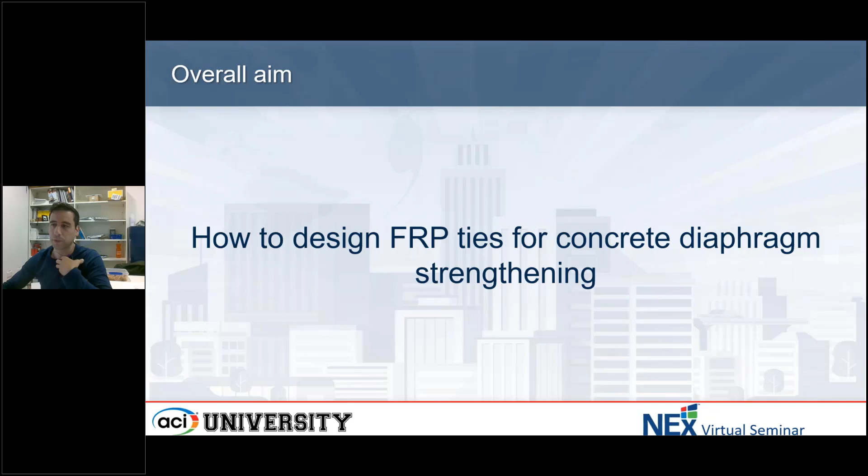The very first thing we realized when we started this project is that virtually all of the research up until a few years ago was on very, very thin FRP ties or FRP sheets, usually 1 millimeter, 0.04 inches. So that does not relate to real life. In a real building, we're going to have 3, 4, 5 times as much. And all of the research is on very short ties, often 200, 300 millimeters, and in real life we have several meters. So that is the first thing that we needed to do: characterize the behavior of FRP ties in a real scenario with real sizes, both with and without anchors.

Then we needed to investigate something that is very critical for New Zealand, because this is partially funded by the New Zealand government, which is precast hollow core precast floors. These are prevalent in New Zealand. We even have the Northridge earthquake to teach us that this is not a good idea, and yet we continued using precast floors until a few years ago. And then once we have those two, we are investigating the global behavior of the diaphragm: in-plane strengthening, shear strengthening, collectors, and how it affects the whole building. This is both for New Zealand and US.

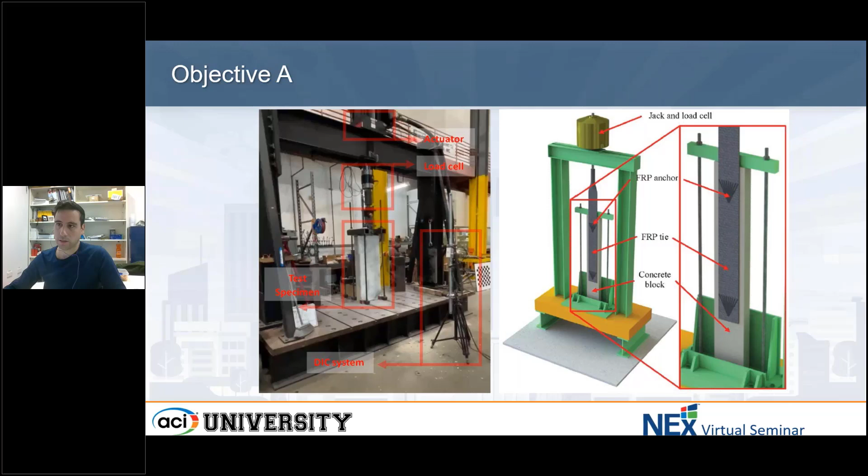We can have anchors in different locations. Then we grip the FRP and we pull up. We cannot see the FRP tie here because we painted it with black and white dots, so we can use DIC to track the strains. DIC is basically cameras that take pictures every second or 2 per second, and then the software can track the pixels so we can see the deformations and strains as the test goes.

Which is what we have here. In this video, we have the FRP tie here. We are pulling from the top, and in here we have the load displacement. This is synchronized. So basically, the load is picking up, completely linear. And then at some point about there, the FRP starts to debond at the top.

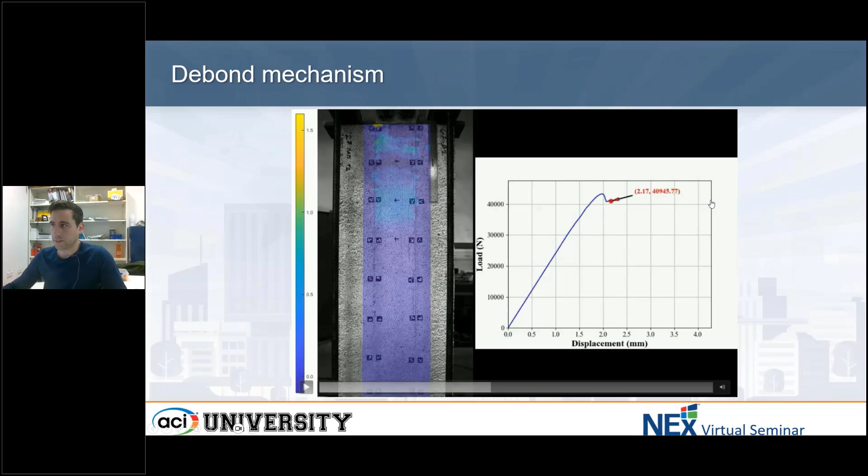Then the strain travels down. There is no anchoring here, so the load is going to be maintained at around 40,000 newtons and the displacement increases. Depending on the length and the FRP thickness and the concrete thickness, we have certain post-elastic deformation in there. It's not a completely brittle system. Same as concrete - if we have unreinforced concrete, it's brittle. With steel detailing, we make it more ductile. It's no different than that.

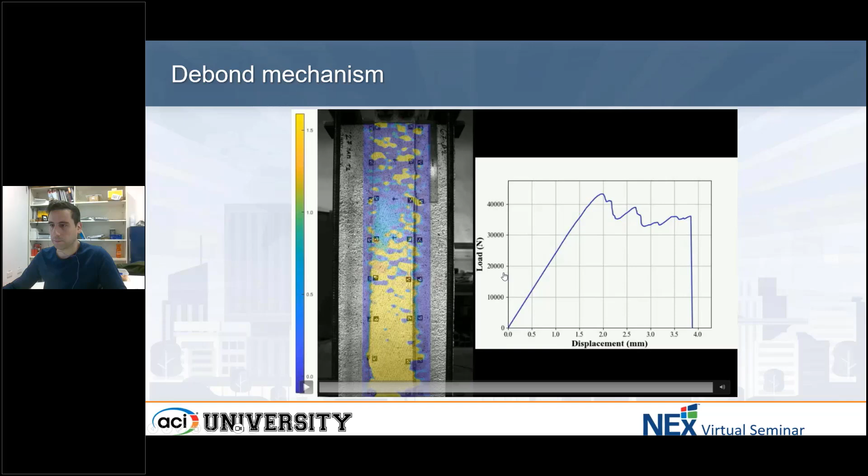Like I said, we did a whole bunch of tests. We collected all the tests that we could find in the published literature - this is published, by the way, so you can find it on Google Scholar. Through this exercise, what we realized is that the debonding strain or debonding force is not only related to the concrete strength or to the stiffness of the FRP, but is the ratio of the two.

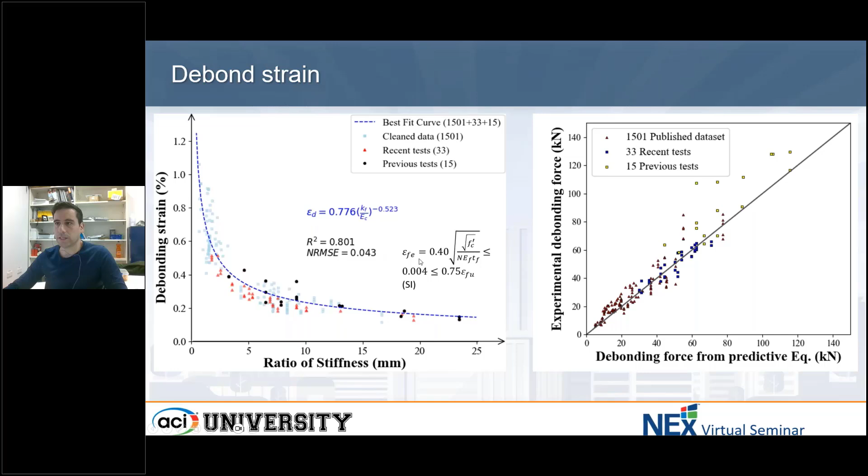So on one side of the spectrum, you could have a very stiff FRP and very weak concrete. On the other side, you could have very strong concrete and very soft FRP. That is the key metric here: stiffness of the FRP divided by the stiffness of the concrete. Now, through some simplifications, we came up with that equation, which we proposed in that paper earlier in the year, to calculate the debond strain. This is the strain at which that initial debonding starts - it's not the final strain.

Now, the problem is this test setup is an improvement over previous research in the sense that it's more realistic. Instead of having an FRP this long, we're having a 1 meter long FRP. We have thick FRP. It's better, but there is still a lot of uncertainty that we are not building into this testing program, especially in a seismic environment. We don't know the earthquake - we cannot predict what the seismic demand is going to be.

There can be imperfections during the construction, during the life of the building. There can be changes in the building. If it's a car park, for example, they're going to have cars running over. We're going to have global deformation of the building moving everywhere. We're going to have out-of-plane deformations. We're going to have compression and tension cycles. There are a lot of unknowns in here that we cannot build into the research program.

Because of that, we need to build further redundancy into the bond system. In other words, we cannot rely on the resin, on the bond, as a reliable load path long term.

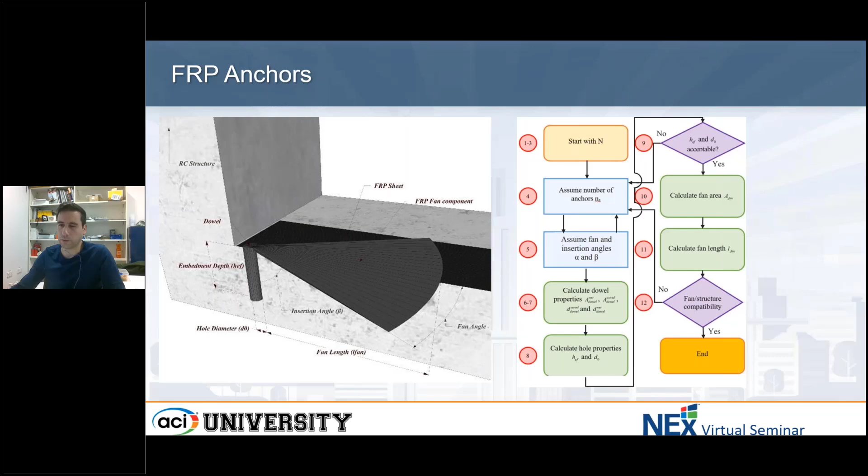Luckily, I spent a lot of years of my PhD working on FRP anchors, and together with the work that many other people have done, we know how to design these FRP anchors. We understand them pretty well. We know how they fail, why, in which situations. So we can design these anchors in different ways, and they have been included into the latest ACI document.

So then we moved on to test ties with anchors at the end. This is the exact same thing as before - strain in this direction, in the loading direction. Now we have an anchor in there.

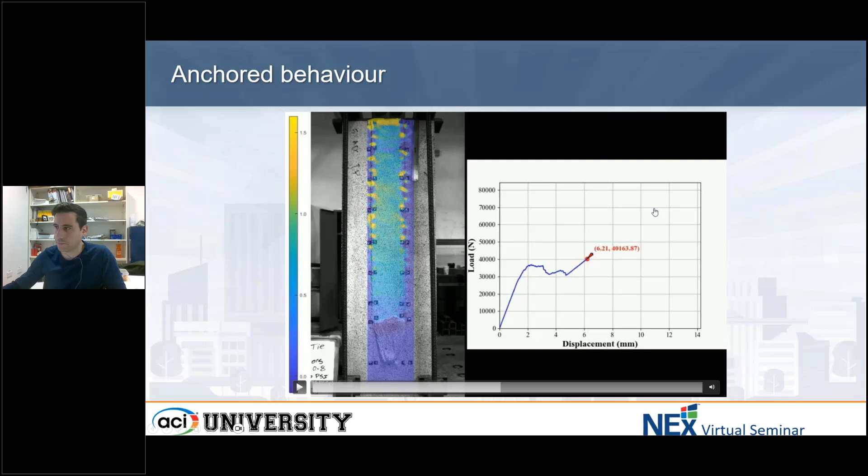So we are going to see the initial load is elastic, then we have that debonding, the strain progresses down. At some point, the anchor is engaged, and then we have again purely linear elastic response, because basically what we have is a spring, an elastic spring between that point and the loading point. That's all it is. And then something fails, either the anchor or the tie fails.

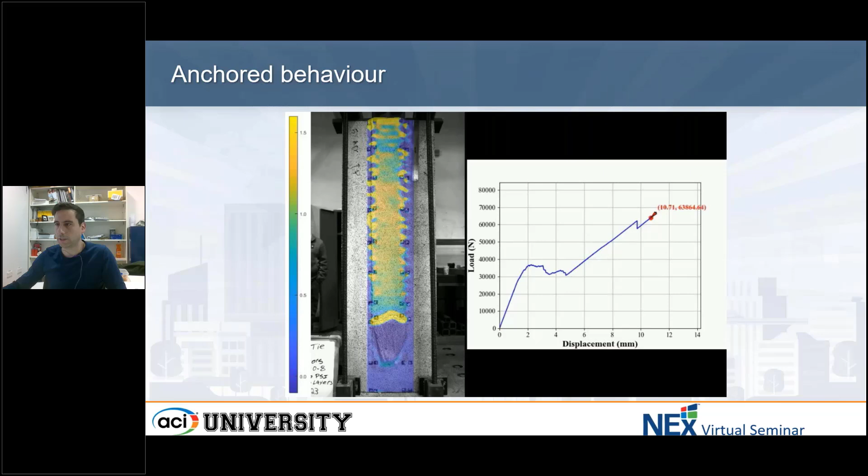Basically what we have now is a trilinear behavior where we can see the initial state at the beginning, then the debonding starts, and that length changes depending on the length of the tie mainly, and then we have the anchor being engaged.

So we did a whole bunch of tests, I'm just showing some here. All of this is either published already or going to be published soon. We can calculate loads, that one from the equation I had on screen before, that one from anchor design. Now we are working to obtain those displacements, so we know at which point in the displacement range the FRP debonds, how long that plateau is, and how much extra deformation the anchor is giving us. We are working through all of this.

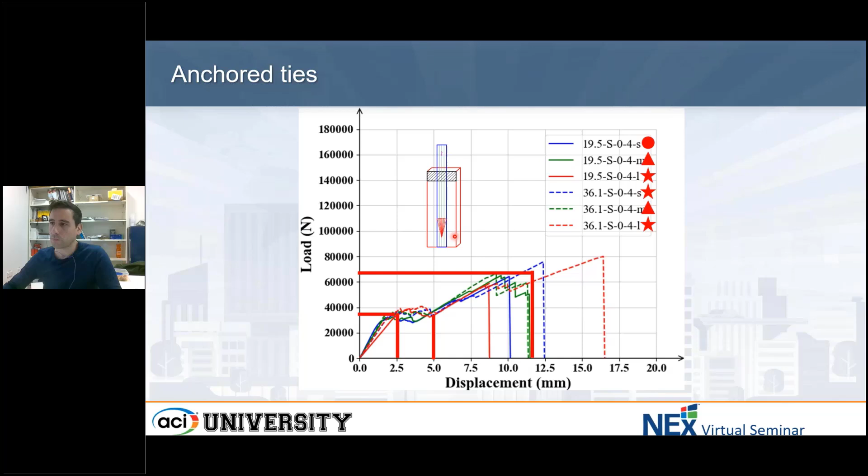So this is with one anchor. Now, the problem we often have in real life in design is that we don't have space in the structure for one anchor. One anchor is not enough to transfer the load that we need, so we need more than one anchor. So the next thought we had is, okay, how far can we put these anchors so they work together? We ran a whole range of tests.

I think we did another 50 or 40 something, basically 12 inches apart. Sorry that I move from inches to millimeters all the time, but because I work with American engineers I need to use American units, and because I am in New Zealand I need to use millimeter units, so it's a little bit of a pain.

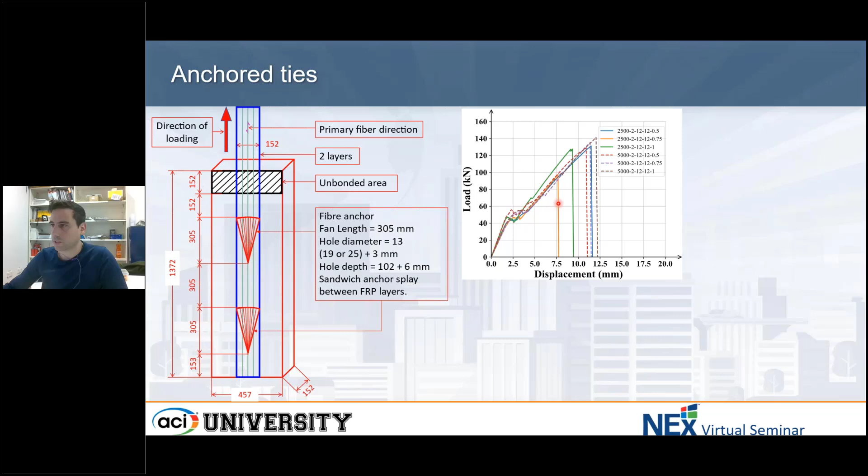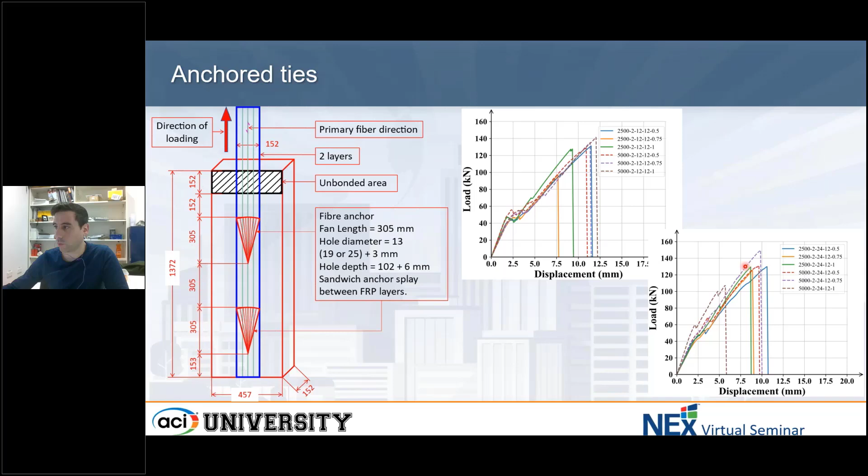Anyways, we have 12 inches apart, or 300 millimeters, and we see that both anchors are working together. We put them 24 inches apart, 600 millimeters, like in the figure, still working together. So we decided to put them as far as we could within the constraints of the equipment we have, so we put them 36 inches apart, as far as we could. We can see that one anchor is giving us about 50 something kilonewtons. Double anchor at 12 and 24 inches have one slope all the way to 125 kilonewtons.

When we put the anchors at 36 inches apart, we have a first anchor that breaks, and then the second anchor takes over. So we can control this mechanism up to a certain point by very carefully designing the anchors and the spacing between them.

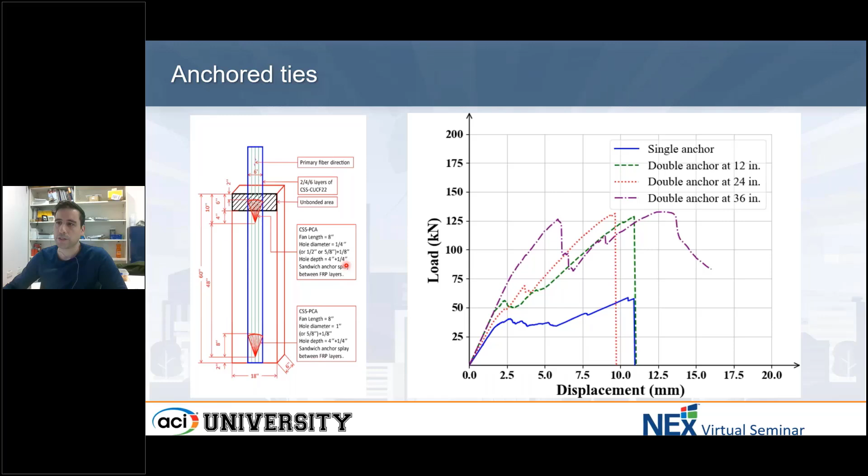The next challenge we faced is that these anchors are relatively deep. This is like 4 inches, 4.5 inches, so it's like 100, 125, 150 millimeters. Sometimes we don't have that thickness in real life, sometimes we only have like 2 or 3 inches, like 50 or 75 millimeters.

So we ran a whole experimental program testing anchors from 3/8 of an inch all the way to 5/8 of an inch, inserted into the slab at 90 and 135 degrees, 2 and 3 inches deep. This is going to be published in November. We observe the peak load and the failure mode, where we break the anchor - this is anchor rupture - or we have pull out and concrete cone failures.

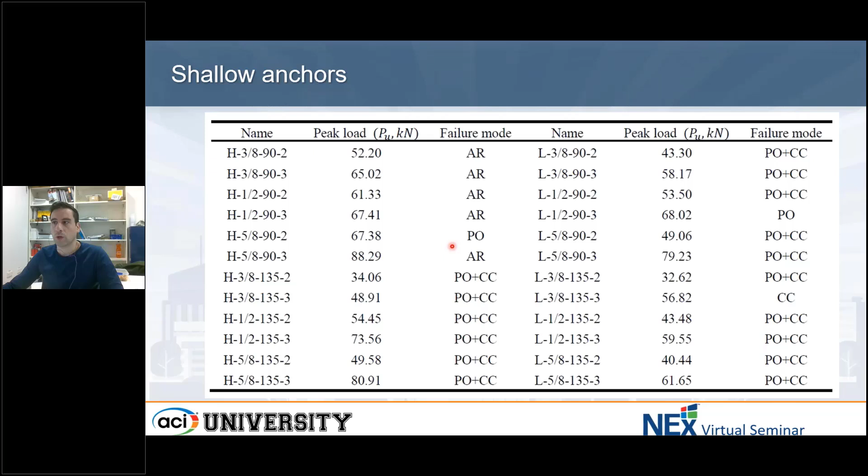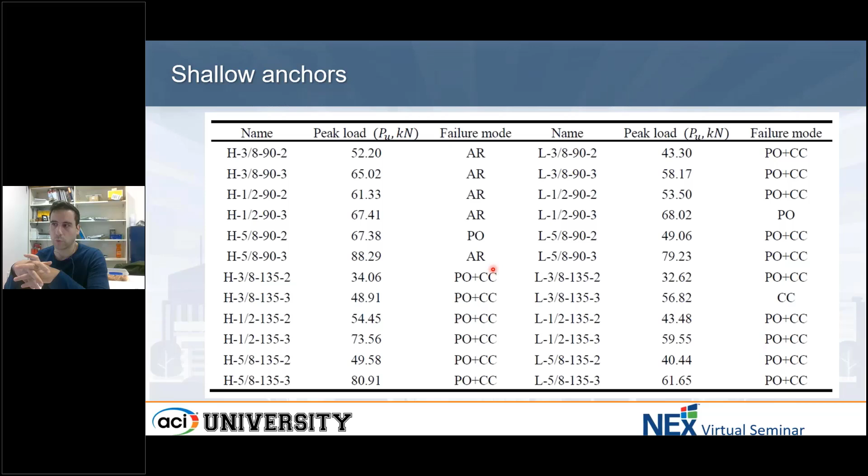So now we know how to design shallow anchors that are installed into the slab at 90 degrees or 135 degrees. I'm not going to be so arrogant to say we know everything about FRP ties and anchors, but certainly we know a lot more than we did a couple of years ago. I think we are relatively comfortable that this is enough for the vast majority of design cases we see in our desks.

So the next step was to look at precast floors. Now, the problem here is quite complex. The summary, without taking too much time, is that in an earthquake, that column - this is not in scale, obviously - is going sideways. That beam is going along with the column up to certain points. That section is going to rotate a lot, that one not so much. And the FRP tie is crossing that interface to anchor into that beam.

Now, the main problem is that this is a very flexible frame, often ductility 4, ductility 6, drift is like 5%. But the floor is precast, pre-stressed, so by definition it is rigid and stiff. It cannot crack, right?

We have a huge incompatibility deformation there, where that crack is one single crack and is quite big. On top of that, we have problems of very thin topping, often 2 or 3 inches. The steel is brittle, it breaks at 2 or 3% elongation. So we have a lot of problems combined into one solution, which is the FRP tie.

There were a lot of questions from our industry partners, very well-known, reputable engineers, and from the ministry. What is happening with that rotation? How is that rotation affecting the FRP tie? Is it going to break it before, compared to the pure tension tests? Is the debonding mechanism different? What happens when we have both the rotation and the tension from the tie?

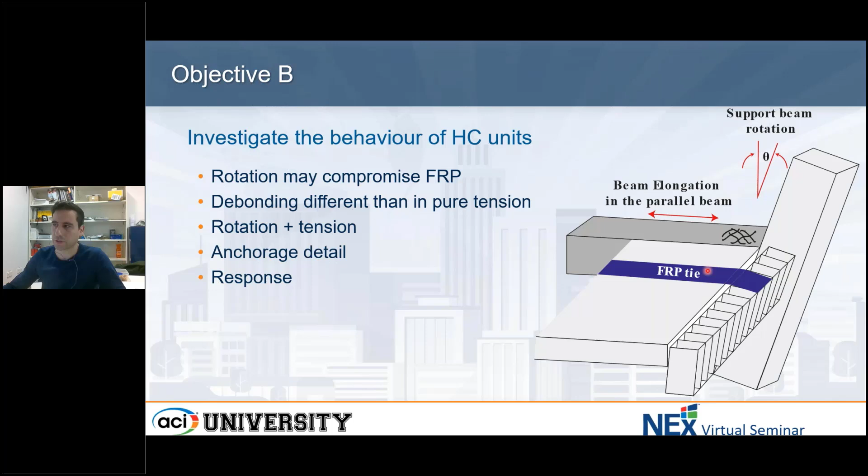We have 10 of these tests. We have completed 6, all of them with rotation only - we haven't applied the tension yet. And the most important mechanism is in the negative moment, when we are going down and the FRP is in tension.

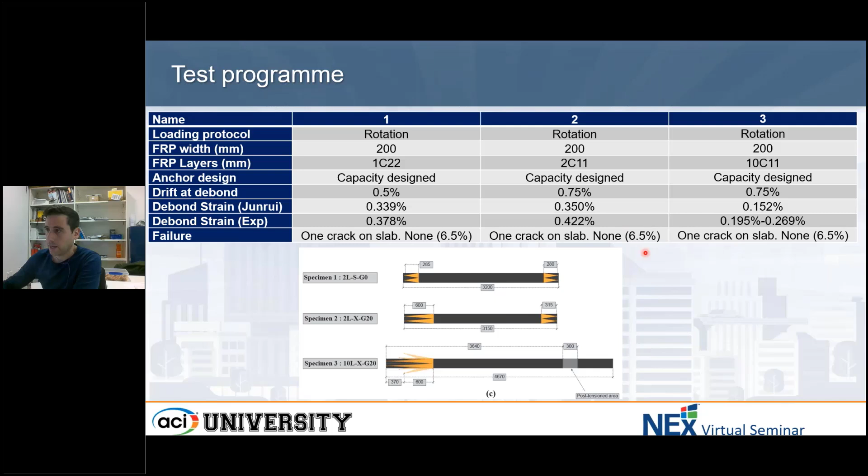It opens until the maximum stroke of the machine, which is 6.5% drift. Now this is the backbone curve. The negative moment is here, so I'm going to flip that so it's easier to understand. What we can see here is basically the exact same thing we were seeing in the pure tension tests. We have an initial very stiff elastic response, then we have the debonding, during which the load didn't decrease - the load was maintained. And then we have the anchor being engaged, which acts basically as an elastic spring.

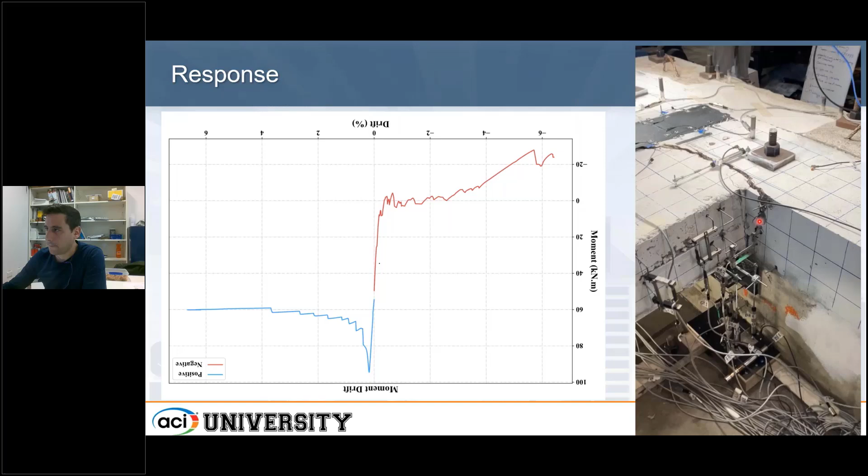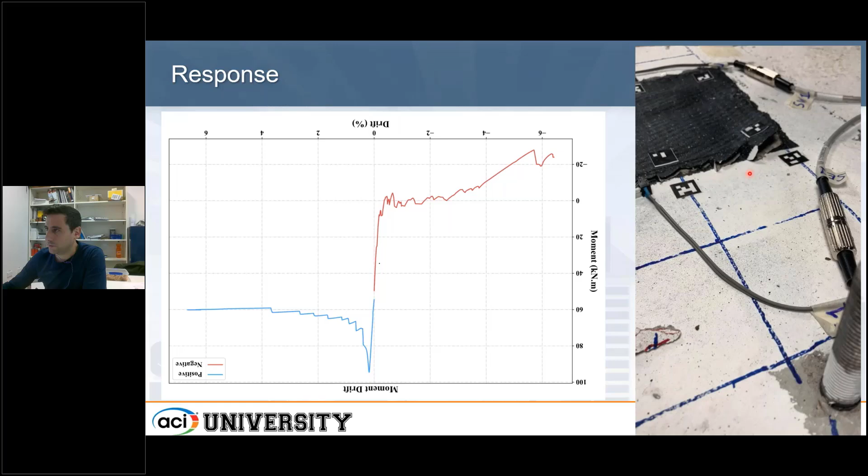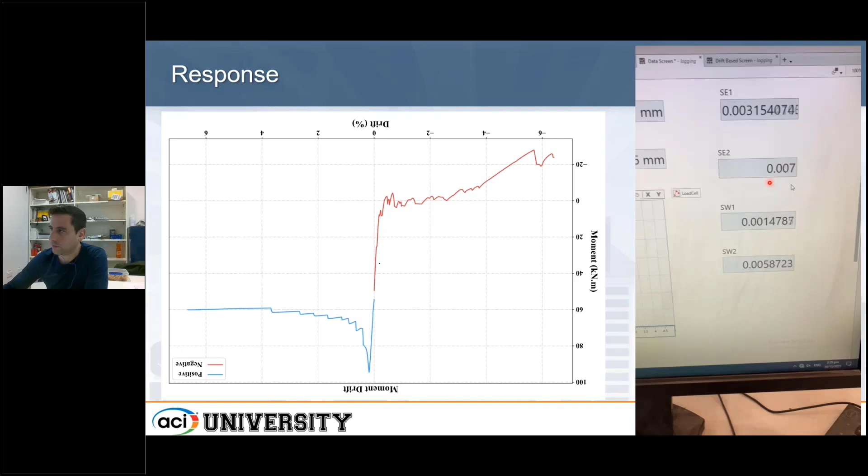So the strain is 0.7%, much lower than the failure strain, and that's at 6.5% lateral drift. It's a very robust solution.

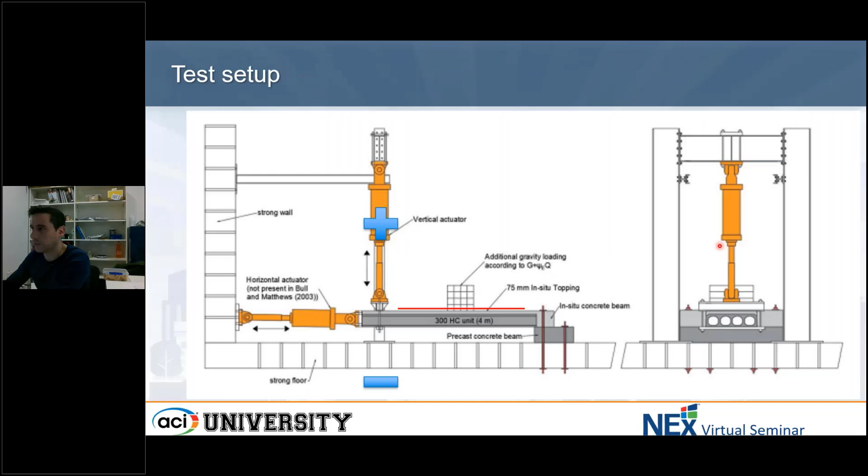The next test, we are going to try to play around with the debond area to understand it a bit better. But what this has taught us is that we can break the beam.

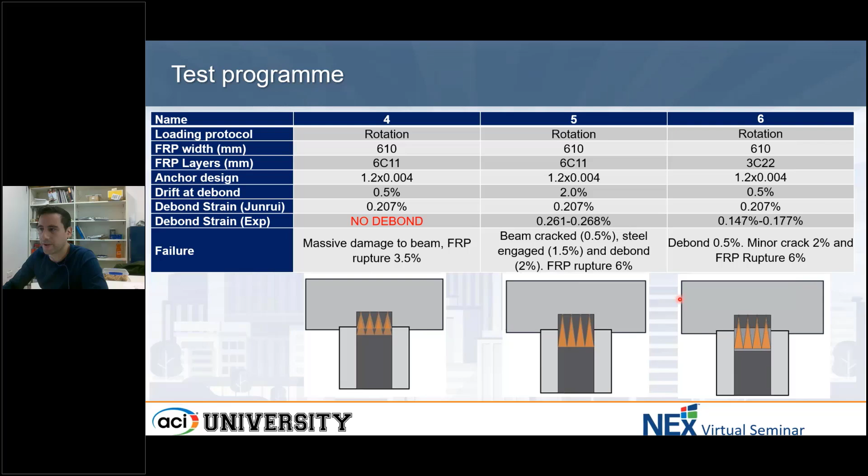So how do we prevent that? Luckily, ACI 318 has a lot of provisions for that, for post-install anchors, breakout capacity, group effect. All of these have been studied in a lot of depth for the last 20, 30 years, so we can calculate those capacities and design around them. So it's good that I don't need to look into that, because I already have enough.

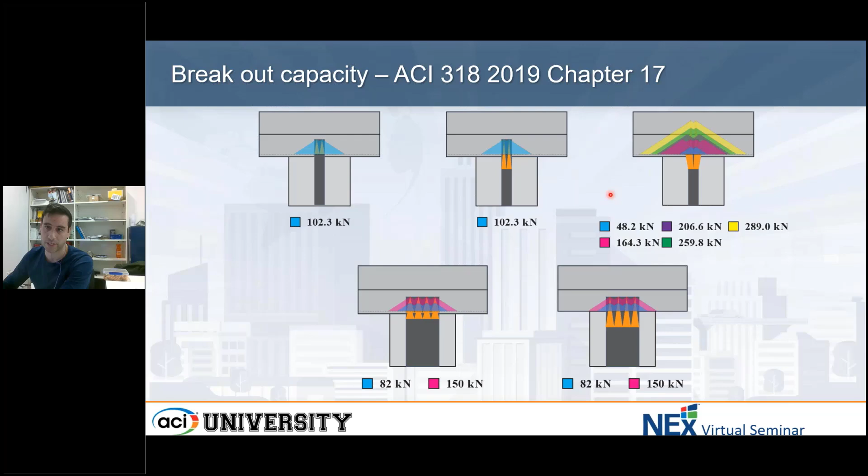But that means that we need to go back to ACI 318 and look at the capacity of the concrete itself, of the existing structure.

Now, what is next? We are going to do 4 more tests, 1 more with only rotation, and then we are going to install the tension actuator to have both. This is going to be completed sometime early next year, probably around April next year.

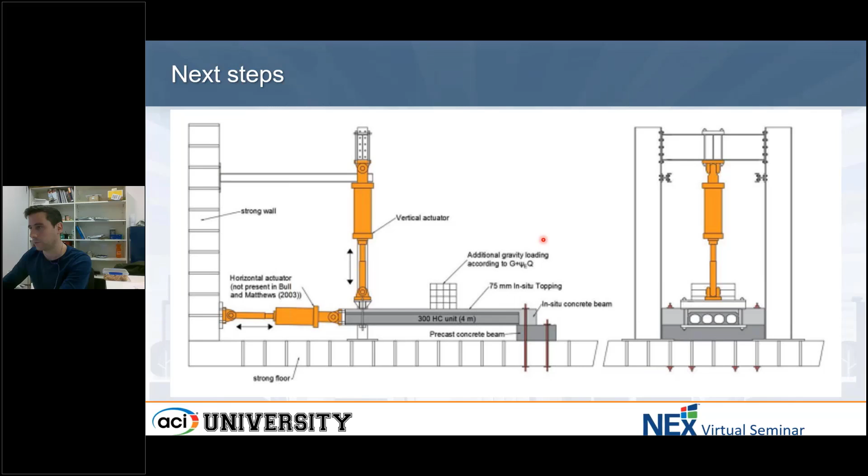And what we are doing right now, from now to April, we are building these collector tests, which is basically a very big slab. I've never seen such a big slab tested before by anyone. This is about 6 meters. We are going to have the FRP on top. Sorry for the quality of the drawings, but the student is still working through them. And then we have the actuator pulling them apart.

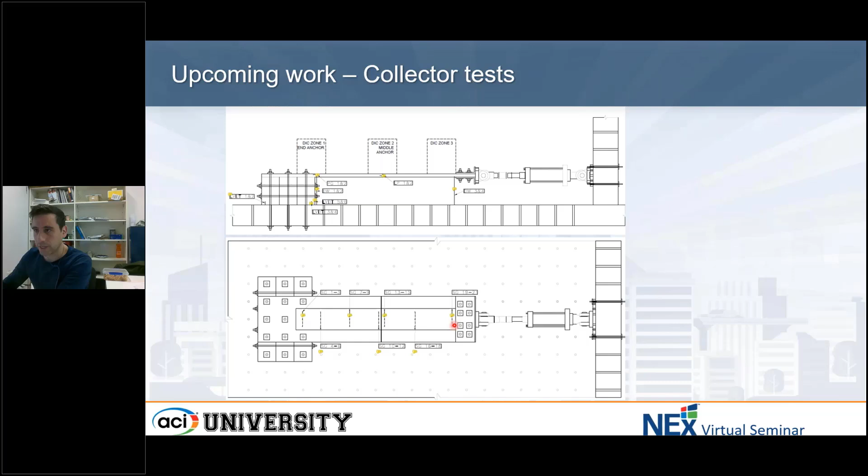Aniket is going to explain later what we are hoping or expecting to see here, but basically it's how we design FRP to restrain the floor from deforming too much. And with this, I'm going to move a little bit towards design, more useful, practical things.

We are about to finish an update in ACI 440, chapter 12.4. Right now, chapter 12.4 is just shear, basically, and it doesn't work very well. It's no one's fault, it's basically the data that was available back in the day when this was written. But now we have better data, like I was explaining before, thicker ties, longer ties.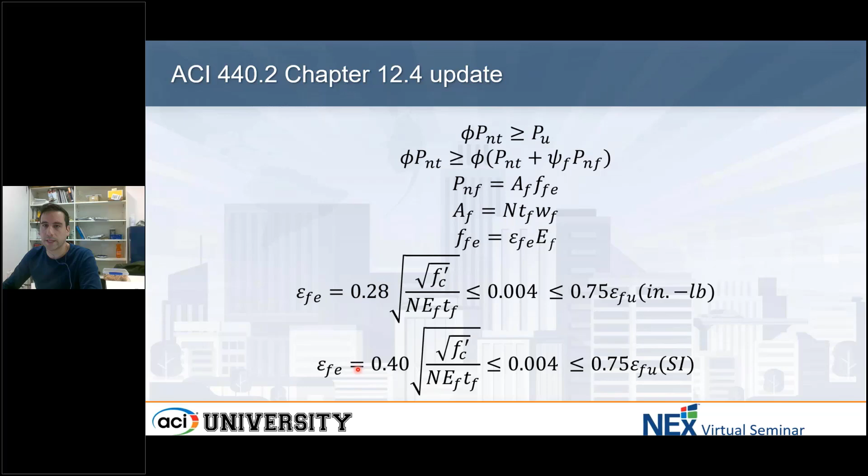So basically what we are proposing, and has been balloted already and is running its course, is that we have a component that is the contribution of the FRP, that is the area of the FRP times the stress, with the stress being, or the strength, being the modulus of elasticity times the design strain, and the design strain is coming from the equation that I showed before. So this is for American units, and this is for international units. Now, what is the actual implication of this on real design?

I have this little slide here where I compare the old method in blue with the new method in yellow. Now, the interesting thing here is that the difference between the two is larger when we have thick ties and low strength. This is about 3,000 psi, I think, which is where it's more common to have these situations in real life. Basically, the strong concrete thin ties that is prevalent in the published research doesn't change too much, but in real life applications is where that change is more significant. It's like 50%, right?

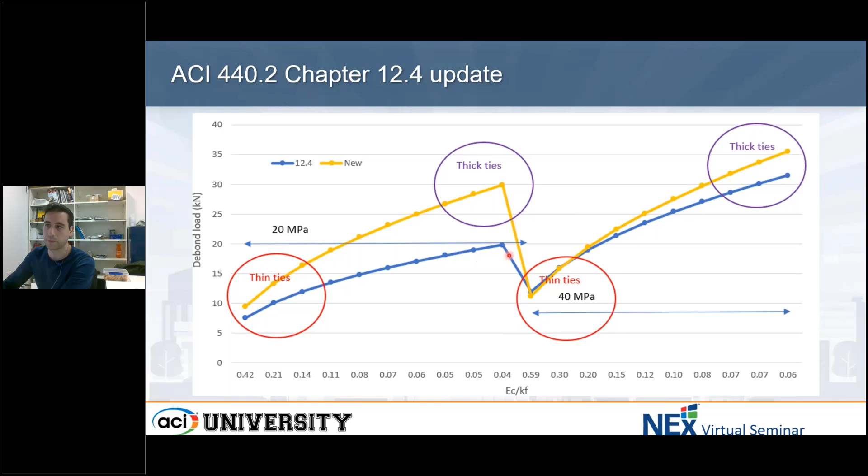Taking all the work that Enrique and others had done so far, we in the US are regularly designing collector elements. We have a building with a deficient diaphragm. Typically engineers come back and build a new lateral system, new shear walls in the building. Most of the time your slab doesn't have the tensile capacity to drag the forces to your new lateral system, so we use FRP as a tensile member to drag forces from the slab back into the lateral system. What is the best way to do that?

Taking all the research together, we put together a design philosophy for collectors based on the research, and we're also going to test it out in the full-scale test that Enrique mentioned.

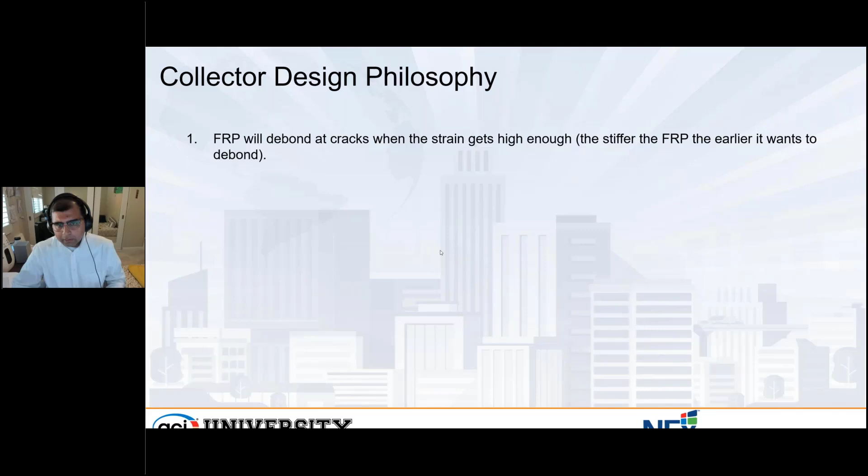In all the tests we've seen so far, we know that FRP debonds at the cracks when the strain gets very high. These are existing buildings, existing slabs, and like Enrique mentioned, they have some imperfections. As your slab cracks, which it most likely will in an earthquake, and the strain gets higher, your FRP is going to debond. We've seen that in a lot of tests.

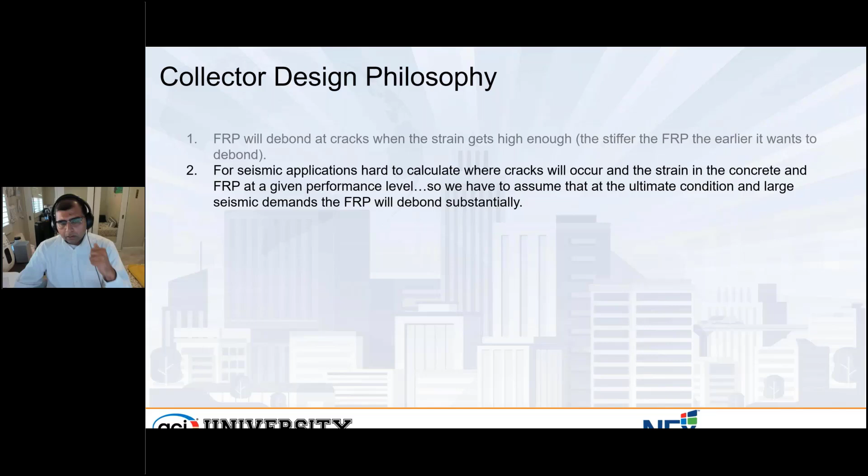The problem with seismic applications, as Enrique pointed out, is we just don't know where these slabs will crack and at what strain or performance level. A good assumption is that at the ultimate condition, your ultimate design load, you're going to have large seismic demands, and your FRP is going to debond eventually at that location. That's a fairly good assumption based on the tests we've seen.

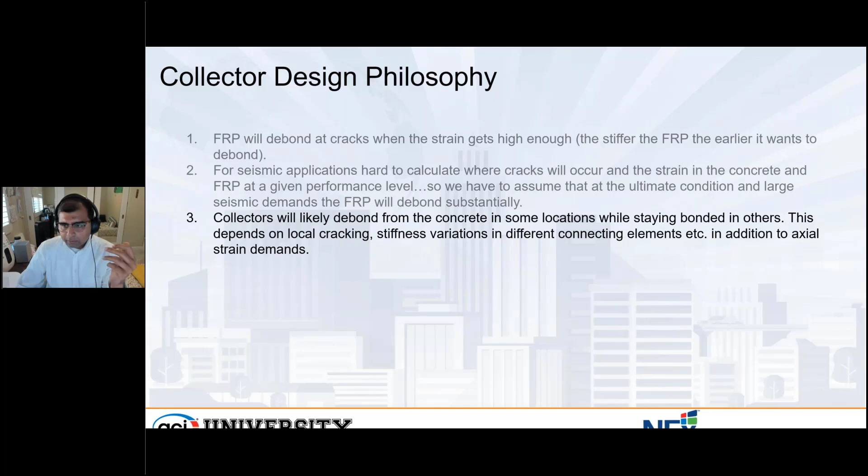Collector elements are likely to debond from the concrete in some locations while staying bonded in others. This is also fairly well understood - where you have cracks, your strain gets higher, and debonding occurs at those locations. This depends on local cracking, stiffness variations in the different connecting elements, and axial strain demands.

From tests we know that FRP anchors help control the debonding and allow the FRP to continue carrying the load. Once your FRP completely delaminates, it's going to keep delaminating like Enrique showed in the video, and it won't have load carrying capacity anymore - you lose that. So if you have anchors spaced regularly, anchoring the collector back to the slab, you maintain load transfer between the FRP element and the concrete element.

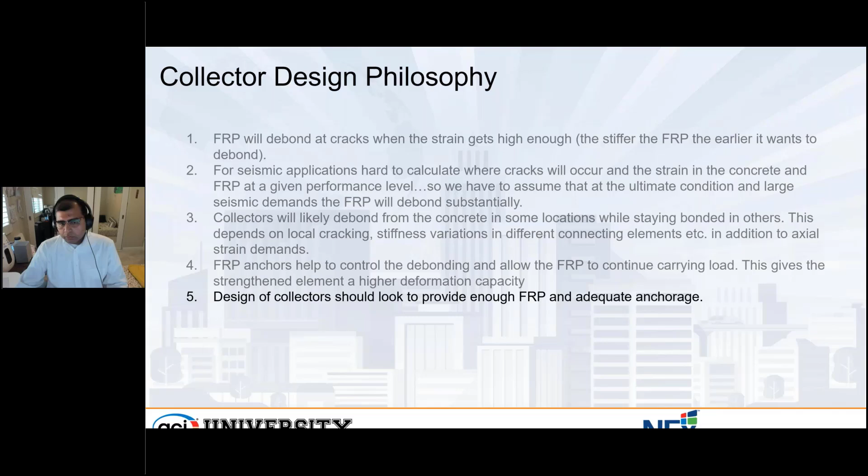The last thing is design of collectors should look to provide enough FRP and enough anchorage - there are two components to it. You need enough FRP and you need enough anchorage. So far in the industry, engineers would look at a load demand and calculate how much FRP they need to meet that tensile capacity, but the second part was how do you adequately detail it?

It's something we do in steel every day - we calculate how much steel we need, how do you detail your steel, how do you hook your bars? I think that step was missing in the industry, and with more testing we're realizing it's an important step to ensure you get the performance you're looking for.

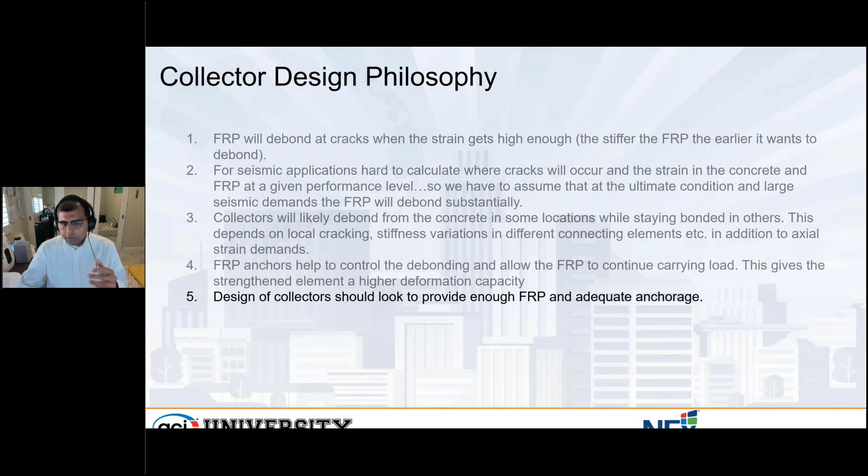So we know the adequate stiffness of FRP works with the concrete slab - the key is that we shouldn't make it too stiff. If your FRP is too stiff, it's going to debond earlier. Most of the time we're designing this to a higher level earthquake, but if you're on the West Coast, you do get these smaller earthquakes regularly.

The bond between FRP and concrete is most of the time enough for smaller earthquake levels. But if you're doing it in ASCE 41, BSE-2E control levels, you are potentially going to have this debond, and then your anchorage is going to keep that load transfer mechanism going.

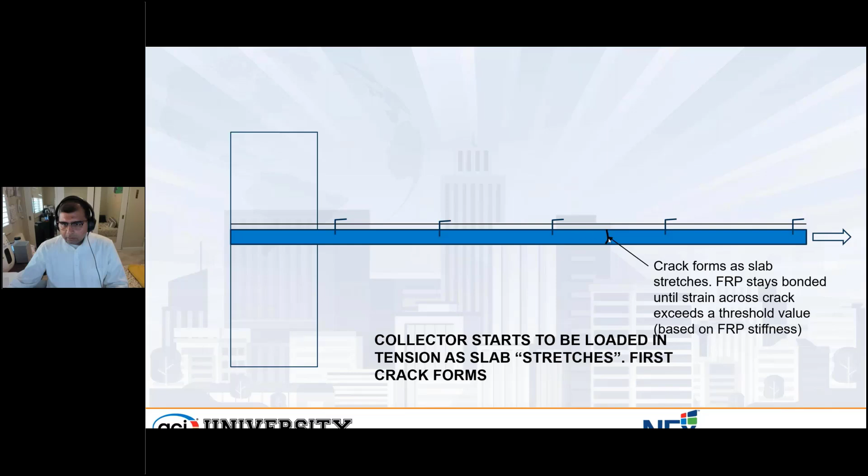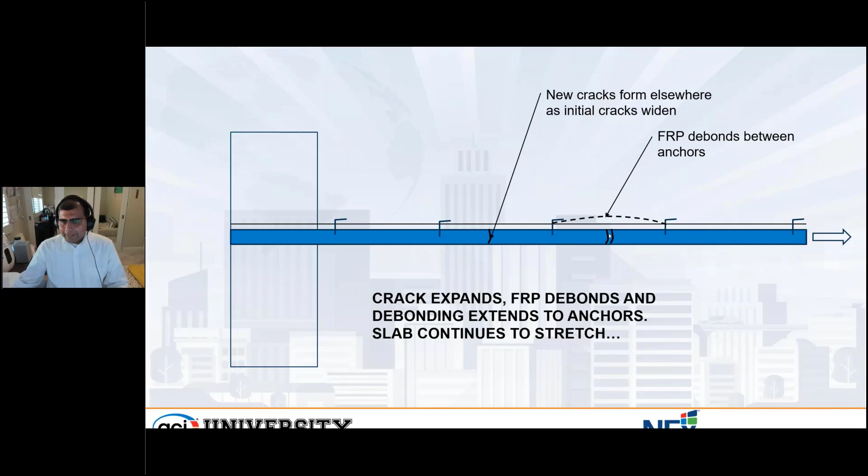So why do we think it makes sense? It's the same sketch right here. At some point, you start developing your crack, which is this black line right here represented in the sketch. Where your concrete cracks, your FRP tends to delaminate in that area. Again, if you have enough anchors, that delamination is restricted between two anchor points. So as your crack starts to grow, your FRP delaminates, restricted between the anchor points.

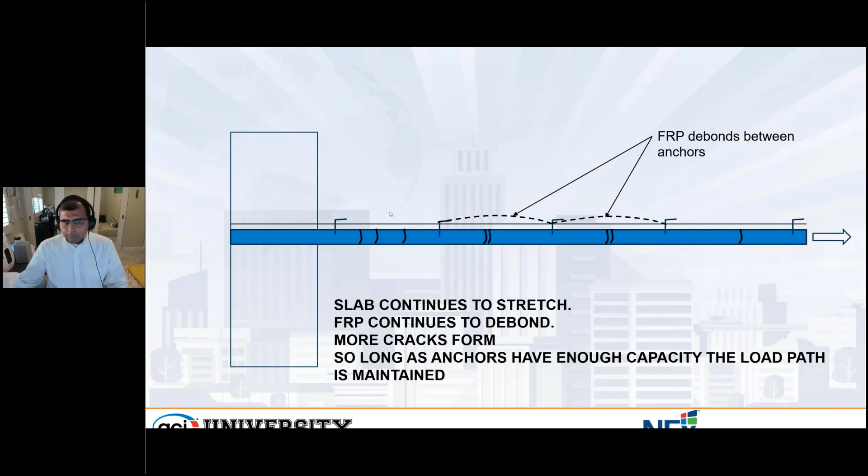Again, it's an earthquake event. At some point, another location in your slab is going to crack, and that crack is going to increase in width. Once that happens, your FRP is going to delaminate at that area. At the same time, your slab starts cracking somewhere else, and you start debonding somewhere else. And then at some point, in your ultimate state or limit state, you'll potentially have an FRP strip that is delaminated, but all the anchors are still going to help maintain that load path.

If you think of a collector element, this is a load diagram. A collector element typically starts with 0 kips at one end of your diaphragm and gradually increases, delivering the maximum force into your lateral system. So this goes from 0 kips, and every foot of the slab it's picking up a certain amount of load, and then it keeps picking up, and at some point it delivers it all to your lateral system. So if we're able to design these anchors to ensure that load transfer, the shear lag or shear effect, you're still engaging the collector, transferring the force into your FRP.

Even if your FRP delaminates, you still maintain that load path in case of an earthquake. This is very similar to your steel plate. Going back to a steel plate, if you're putting a large steel plate on a slab, you're typically never just going to rely on the bond. You're going to have some amount of anchorage detailing involved. So the similar concept potentially works for FRP as well.

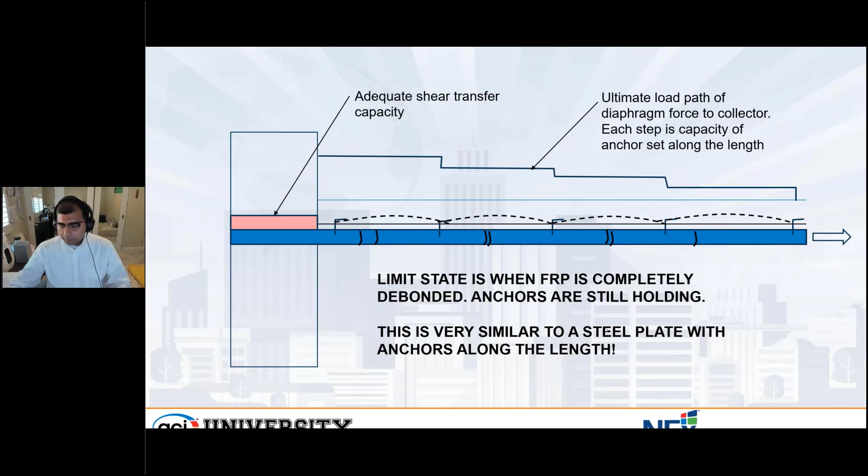So again, looking at the design philosophy: provide enough anchors to ensure that the load path can be maintained, even if the FRP totally debonds at the BSE 2E, which is your limit state. Calculate area of FRP, similar to how you would do it with steel. And then once you do all that, you have to ensure you have that load transfer mechanism. You can either do it with steel angles or with FRP, but all that force now has to go from the diaphragm or from your FRP collector to your lateral system, which is a shear wall in this case.

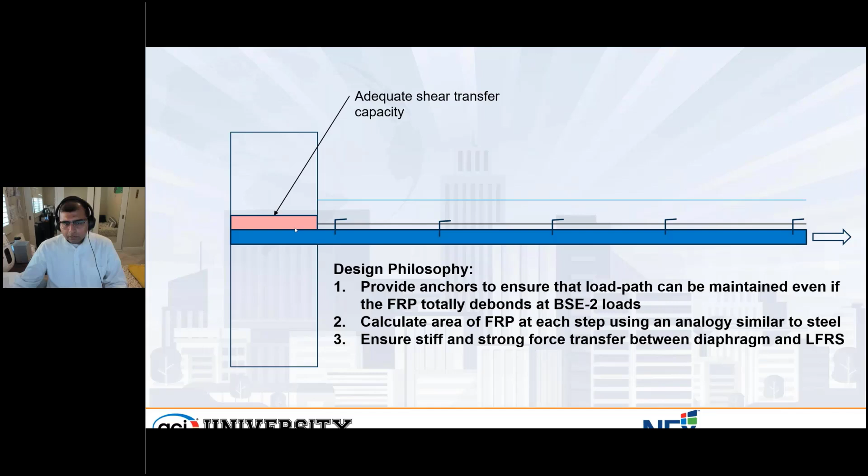Taking all this together, a summary for collector design - and this is important because there is no good guidance, we are looking at publishing this. Enrique showed the first equation, but ACI 440 now has a ballot. It has a task group that has come up looking at all the data Enrique showed, for the debonding equation for axial tension strengthening capacity for an FRP member, and a collector is a tension element.

So the new proposed equation is given here, 0.28 times this term right here. You can calculate your debonding strain. Again, as you add more FRP, the debonding strain goes down. It's also a function of your concrete strength. So get your debonding strain with this equation.

Provide anchors to ensure the load path can be maintained even if FRP debonds - I think we've seen that through testing as well. Maintain adequate force transfer between a collector element and your lateral system. And again, FRP is a tension member, but you still need to check your concrete for compression, because in a collector you get tension-compression cycles. You want to ensure your concrete has enough compression capacity for that collector force.

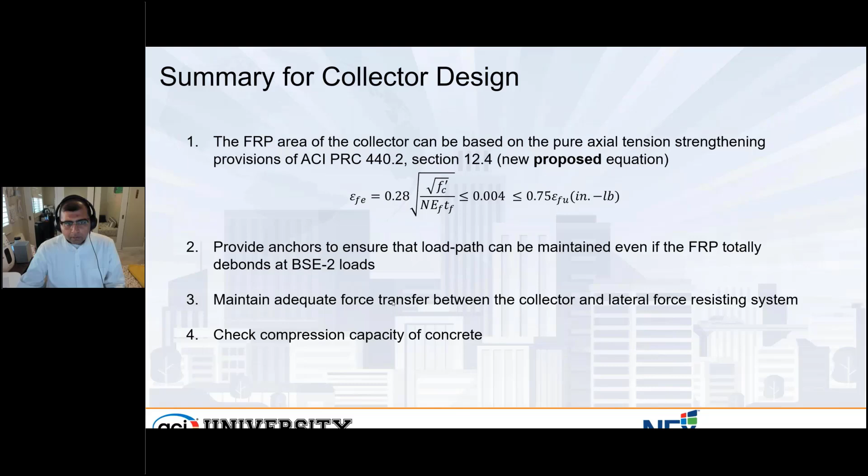So this is our design guidance for collectors at this point.

Going forward for diaphragm shear, moving along from the collector behavior to more of a shear behavior of the whole diaphragm. The goal of this was to investigate the effectiveness of multi-layered anchored and unanchored CFRP retrofits in improving the shear strength of diaphragms.

The goal here was to explore reverse cyclic tests. There haven't been many cyclic tests on full-scale or half-scale concrete diaphragms, but essentially larger specimens. We wanted to look at the different effects of FRP layup and anchoring, comparing stiffness, ductility, strains, and crack patterns, with and without anchoring. The key here was to use realistic base materials.

In most projects on the West Coast, in California, on older buildings, you have concrete between 2,500 to 3,000 PSI, so we wanted to keep the same type of concrete. We wanted to use very little steel in this test program, again trying to replicate what steel is there in existing buildings. And we wanted a lot of FRP, again that we do on projects every day, to make sure that putting more FRP, we understand the behavior of your diaphragm element.

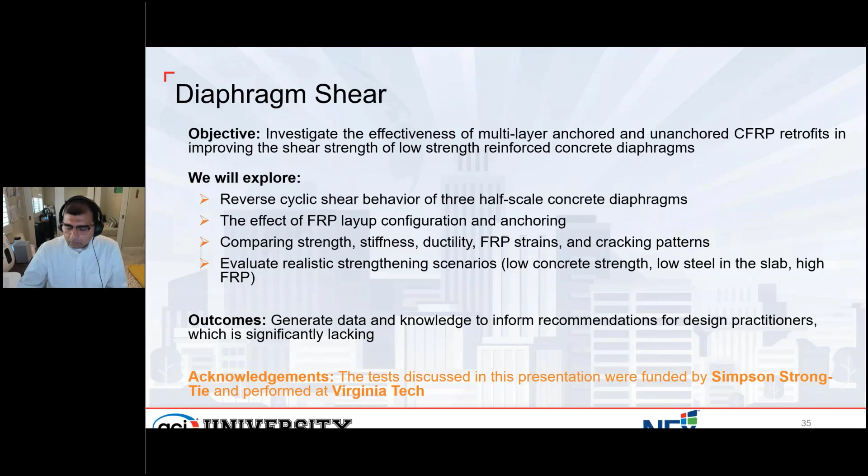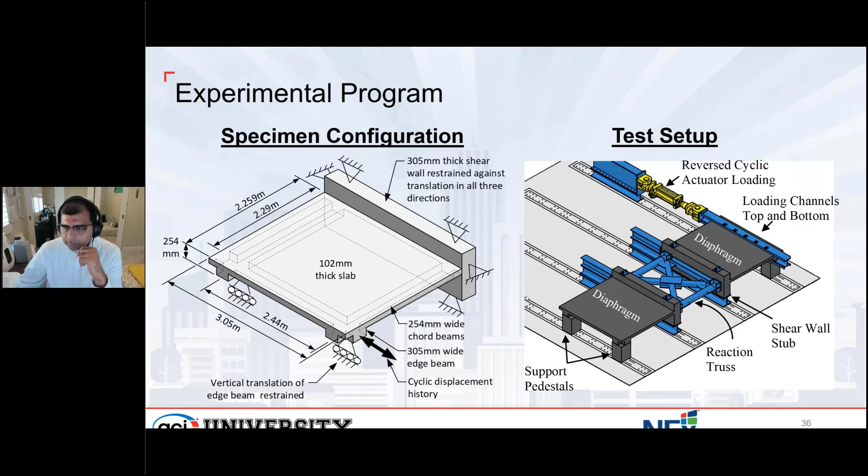The three tests that were done were after they did a series of six tests for an ACI project. We used about 2 layers of 0.04 inch thick CFRP material.

Because this is diaphragm shear, your loading is in one direction, so all the FRP was oriented north-south in this figure. We had anchorage, and on the ends of the diaphragm or the ends of the specimen, you see two rows of anchors, because if you put a single anchor, the anchor becomes quite big and it's not feasible to install a big anchor in a very thin slab.

Based on the chart that Enrique showed, up to a certain number of anchors, if you put these anchors in series, they are able to share the load between them. It's reasonable to think that behavior continues through 2 or 3 layers of anchors, but once you exceed that, the behavior is no longer valid. So for example, you cannot just put 5 or 6 anchors and say that all these anchors are going to contribute equally to the total capacity of the member.

So we wanted to make sure that we don't break the anchors. We provided enough anchorage on both sides.

The next specimen had the same amount of FRP, but we completely eliminated the anchors, just to see the behavior of anchors versus no anchors. Then the last specimen, we installed the FRP in both directions, so you had FRP layers left to right and north-south, and then we anchored on all sides of the diaphragm. So: FRP north-south with anchors, FRP north-south with no anchors, and FRP in both directions with anchors in all directions.

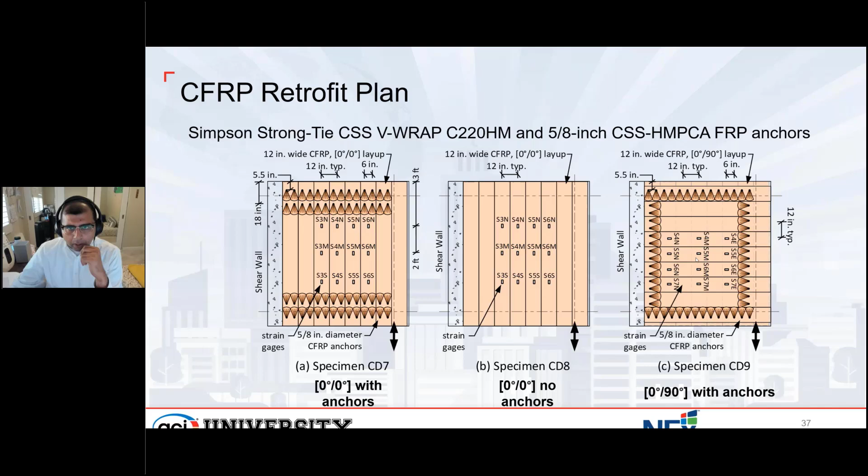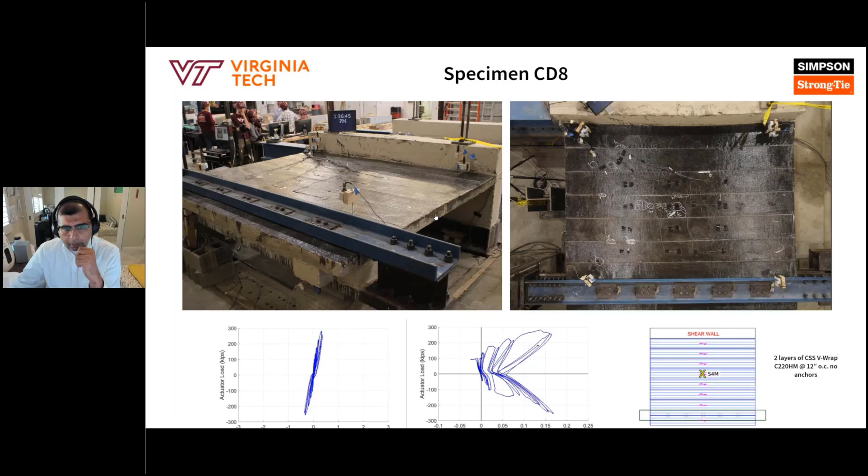One thing to note here—maybe focus on the left picture, because that gives you a good idea about what happens to an unanchored FRP. If you don't have enough anchors, this time-lapse video shows that at an instance, your FRP completely delaminates. Because there are no anchors, the strip delaminates in an instant. I'll play this again—in a fraction of a second, all your FRP is essentially delaminated, and you lose your entire reinforcement in a quick instance. Something that is not quite desired on an actual project.

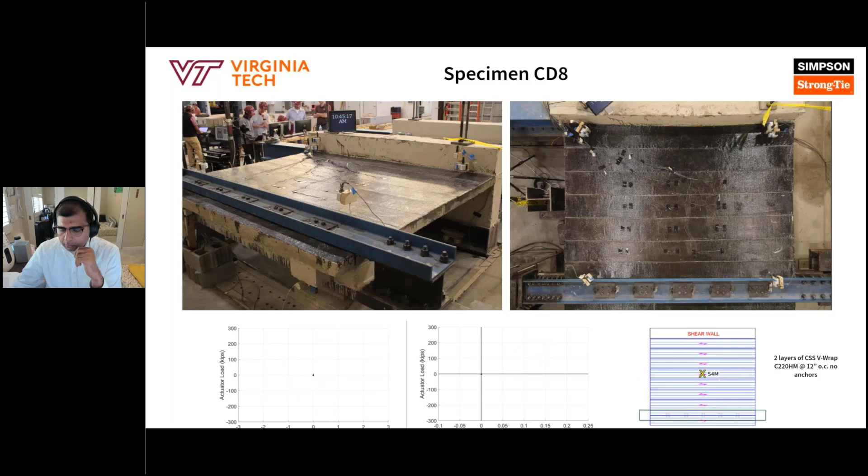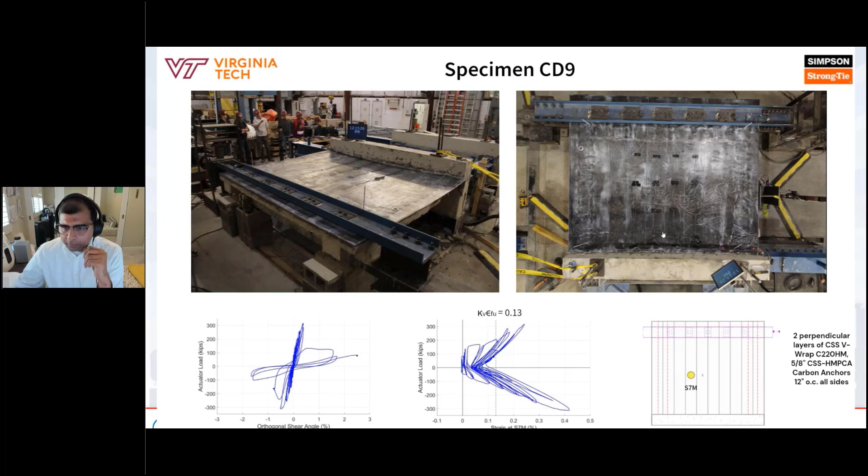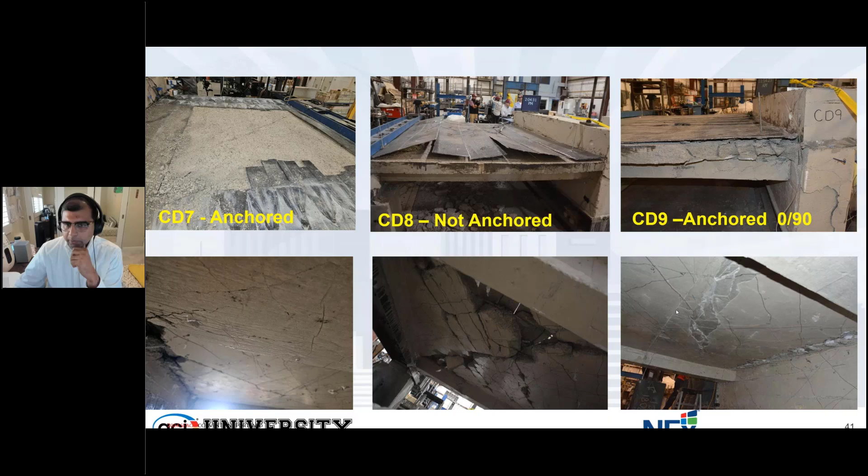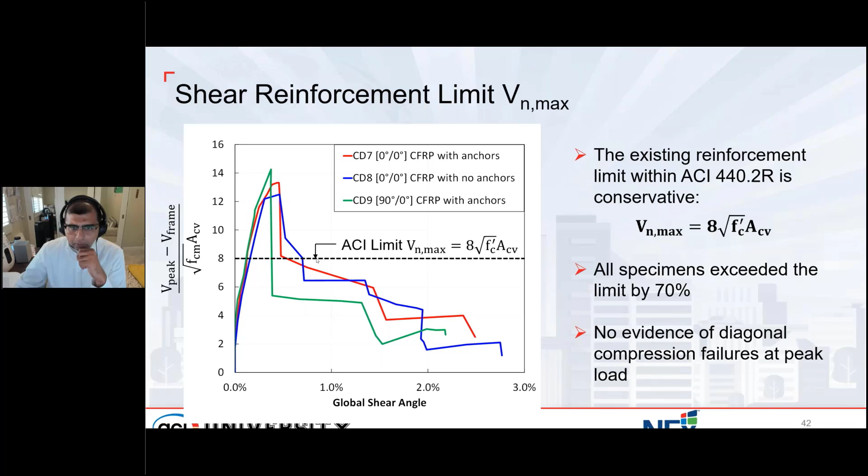So we didn't stop there. There were also a lot of projects on lightweight concrete specimens, and ACI 440 currently doesn't address lightweight concrete specimens, because there is no testing on lightweight concrete. So when a slab or member has lightweight concrete, how do we design FRP? There are varying thoughts—some say it behaves similar to normal weight concrete, so you use the same equations and design it the same way. What we've typically done is take a reduction using a lambda factor, which ACI 318 has a reduction for lightweight concrete.

So we used the same concept, but we really wanted to test what lightweight concrete does. These tests were done very recently, and we did see a significant increase in FRP.

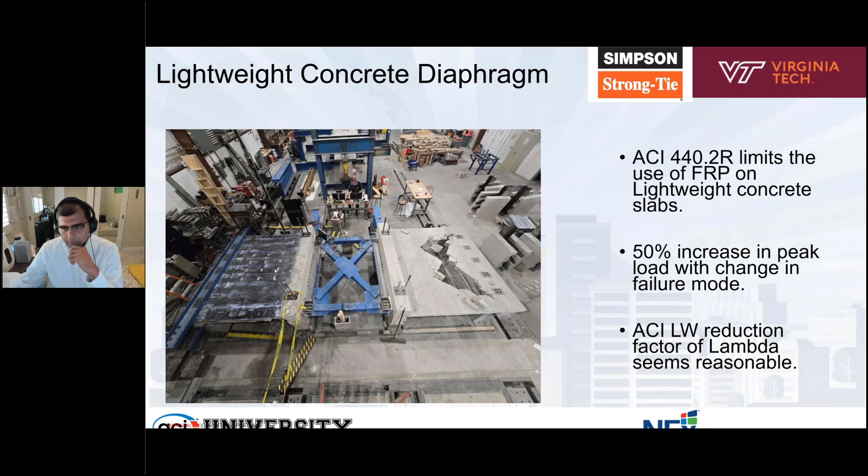So the one on the right is a control specimen, the one on the left is a strengthened specimen. I'll show some videos. This video here is a control specimen, and again the setup is the same.

Now you have a concrete slab with no FRP on it, so you'll see the failure quite well. It's very deficient in internal reinforcement, so you see all your shear cracks being developed in the specimen, and then all the cracks start to intersect and you get a shear failure of the concrete specimen.

Pretty well understood. Looking at the FRP strengthened specimen, again similar to what we saw, the FRP here was in both directions, very similar to what you saw, the specimen held pretty well. At some point, you just lost your shear transfer between the specimen and the wall and had a sliding shear failure mechanism at a much higher load.

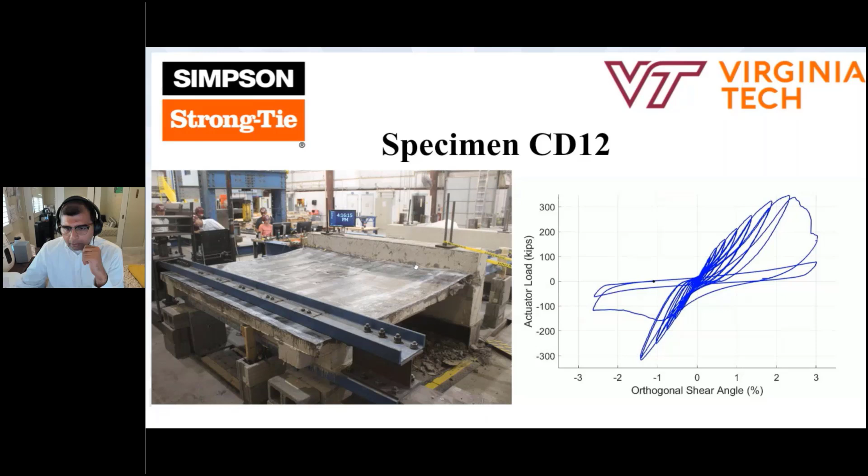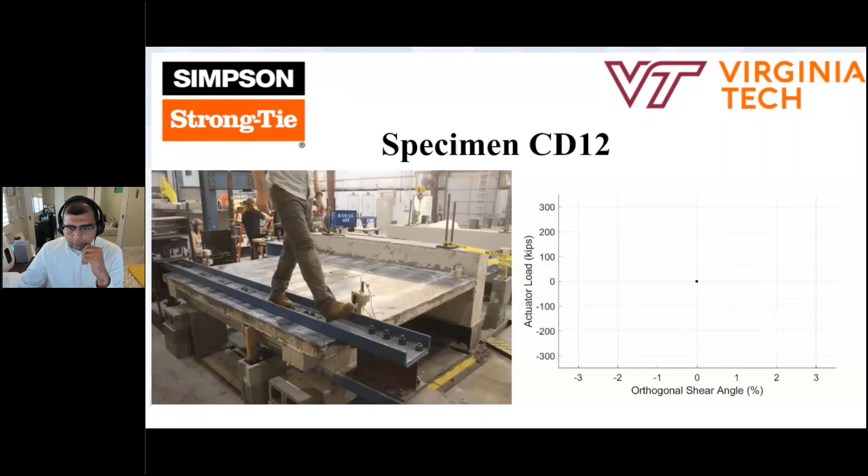So this was again at about 13 to 14 square root F prime C. If detailed very well, the FRP gives you really high capacities. This was a cantilever diaphragm test.

Just to highlight the importance of adequate anchors, we also did some tests in our Simpson lab on specimens which were not cantilevered. These were again low strength concrete and high strength concrete specimens with very little shear steel in between. These specimens were actually loaded in between rather than at the end. We loaded these specimens in between right here.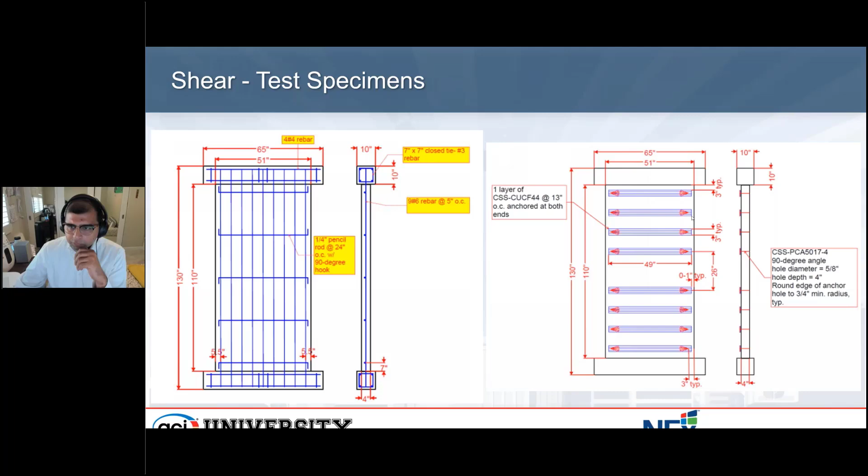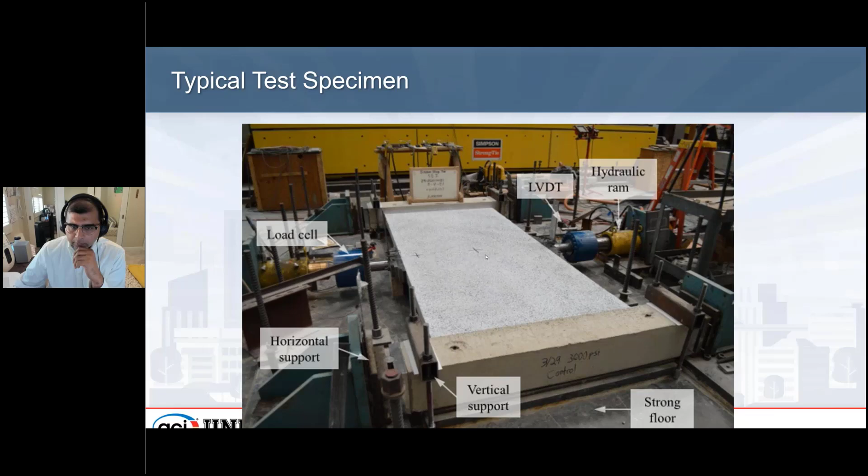We had strips of FRP, and we anchored the FRP well enough. This is the test setup where we had a control specimen. We had actuators in both directions, putting a cyclic load on the specimen. This was pushing on from the right, then when it retracts, this actuator pushes it, and you have this cyclic loading of the concrete specimen.

The control specimen failed in shear, which it was designed to do since it doesn't have enough shear steel. You get your classic 45-degree shear crack that you would expect from the specimen.

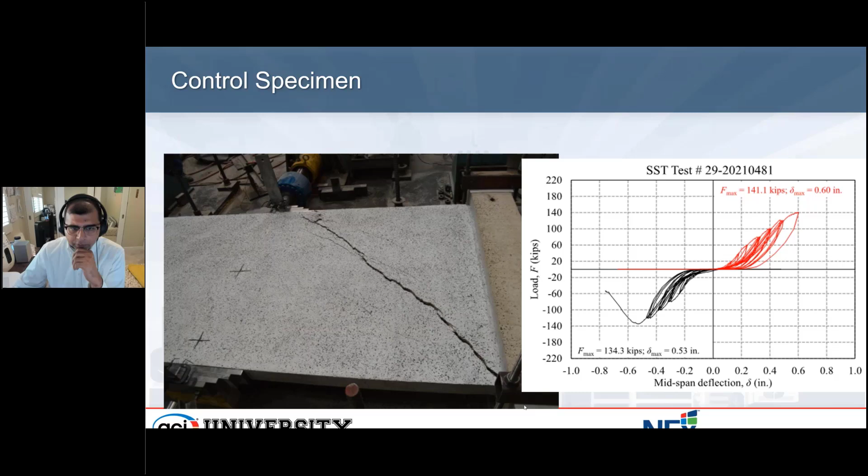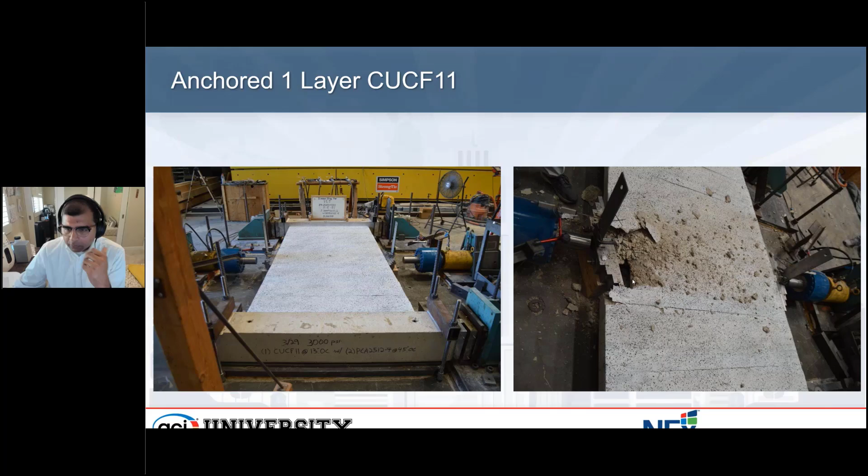This was your strengthened specimen with FRP. It actually achieved a much higher force. Unfortunately, it failed in compression because the force went that high, but at that point FRP had done its job.

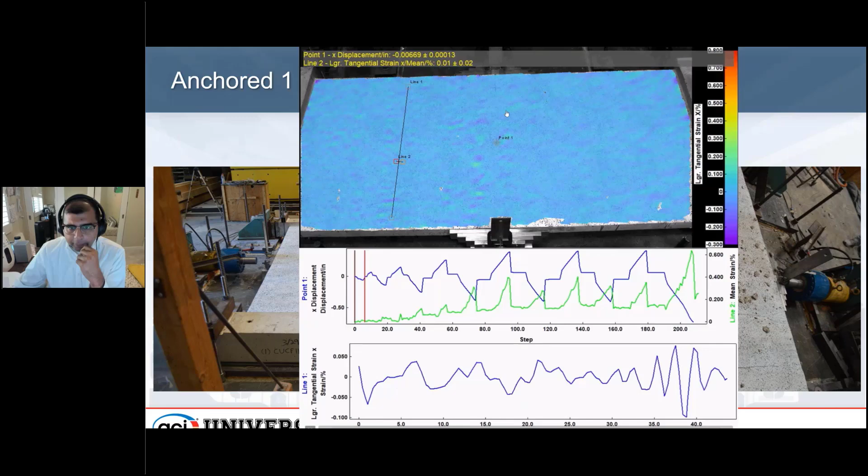And this is a similar DIC video. In this case, just look at the slab as it's moving up and down in the middle here. You have strips of FRP going north-south. All these yellow lines are cracks developing in your concrete specimen. The FRP is bridging across the cracks, and the FRP is all anchored, so it's holding the specimen together.

Then at some point, as the forces get significantly higher, you're just crushing the concrete at this location. We'll see that shortly, and that's where your crushing happens. So if you look at this picture right here, right before the crushing, you have massive cracks in the concrete. The FRP is holding all those cracks together, and the anchors are holding quite well.

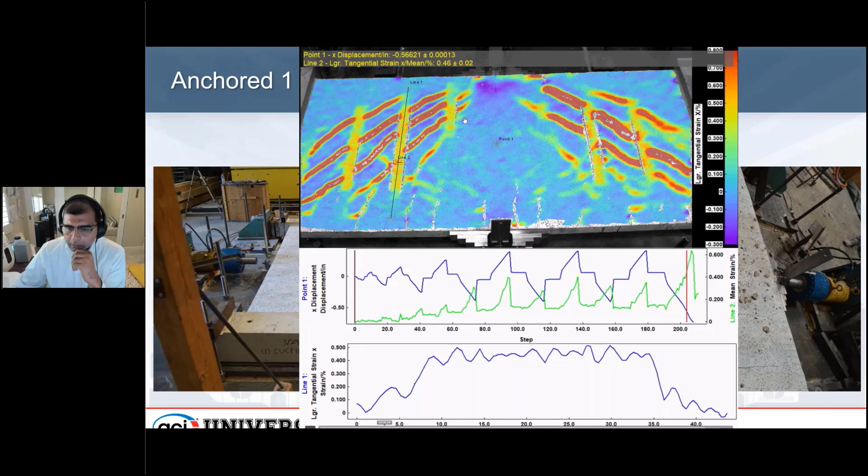So again, if designed correctly and detailed correctly, FRP can add significant strength to your diaphragms.

We are still recommending a reduction factor of 0.75 for one-sided retrofit. You're calculating your VC and VS normally how you would do it, using the same ACI equations for calculating the shear capacity of your FRP, and using the debonding strain that is in ACI 440.2 equation 11.4.1.

This is the shear debonding equation in ACI 440. If you're doing lightweight concrete, our recommendation is to use a lambda factor, a reduction factor, depending on what your lightweight concrete is. This follows the same guidelines in ACI 440 today, except for the use of anchors. The use of anchors is important to achieve the performance you're looking for.

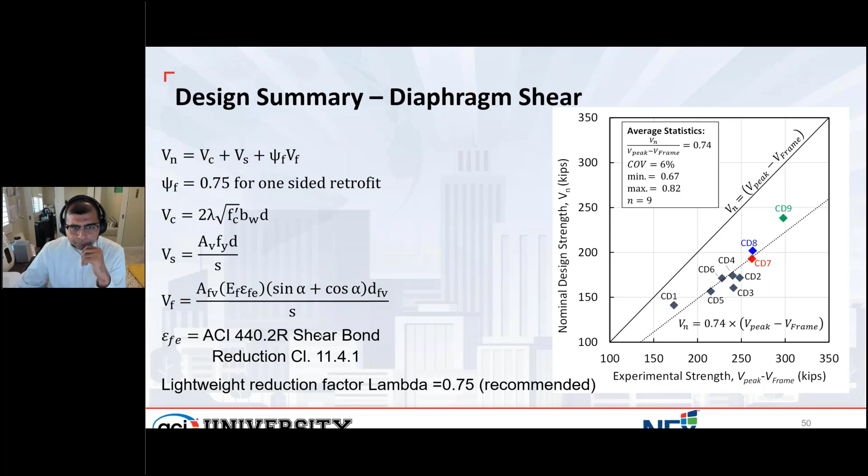Moving on to flexural behavior of diaphragms, which is essentially your chord members. I'm not going to talk a lot about it, but there was a good amount of testing, about 40 to 50 specimens that we did. This results in about 22 here that were done in Stockton.

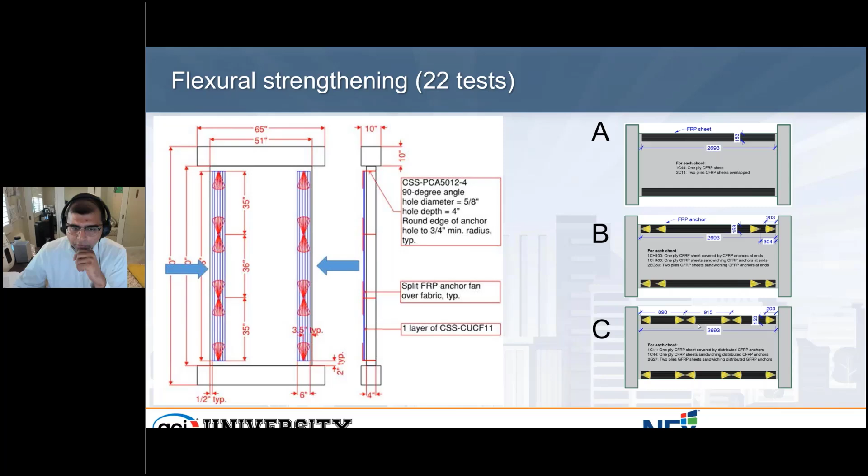You had a specimen with very less flexural steel. We put chords in both directions, which are your FRP strips, and loaded it in the middle. Tests were done on unanchored strips, anchored strips at the end, and then with anchors in the middle. These middle anchors followed the guidelines to break the ties, so these were pretty massive anchors in the middle. As you'll see, that's not how you should design your intermediate anchors.

So just FRP with no anchors, like Enrique showed in his graphs, the behavior is mostly linear elastic. It goes to a certain point, you debond your FRP, and you lose your capacity. There's not much deformation capacity in your member.

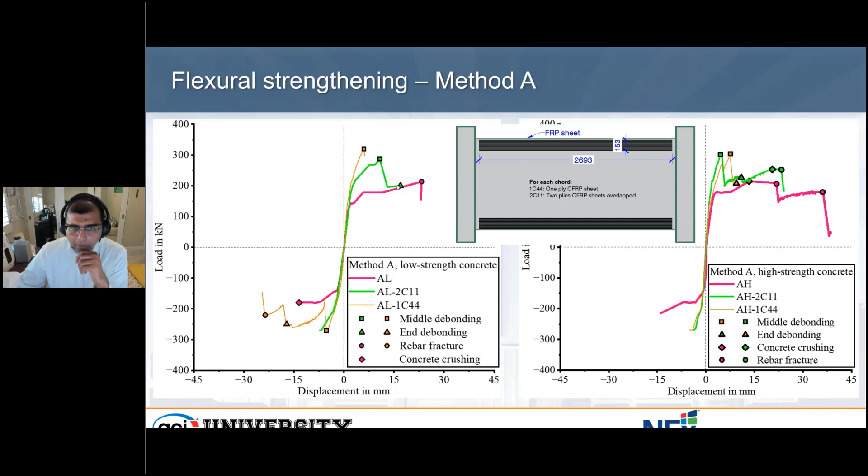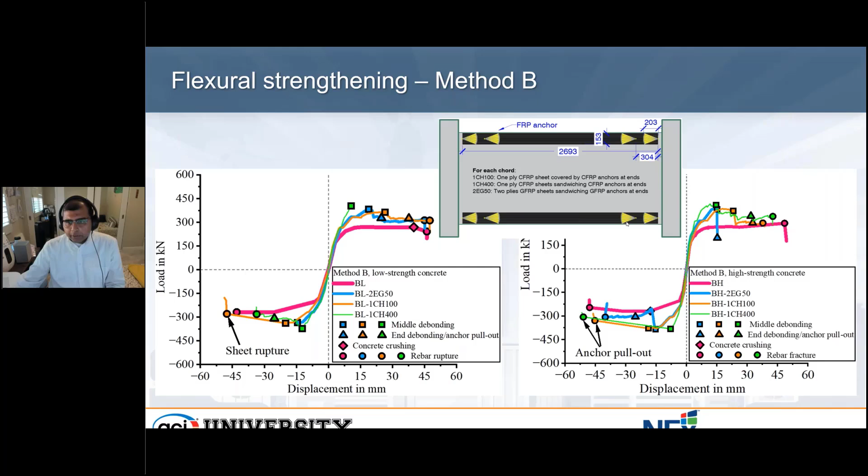As you look through anchors at the ends, which is basically at 8 feet on center for your longer ties, you get higher capacity and good deformation capacity. You're still debonding, but your anchors are holding it together. Really good performance of what you would want or expect in your seismic applications.

With intermediate anchors, you get kind of a mixed behavior. You start losing strength, and your deformation capacity is not that high. This is because these intermediate anchors are quite big and you actually rupture your strips. So our guidance to use intermediate anchors is to use smaller anchors, which is also what Professor Jacks presented in his ACI summary, so that they are able to share the load and the stresses can transfer beyond those anchors up to the end anchors.

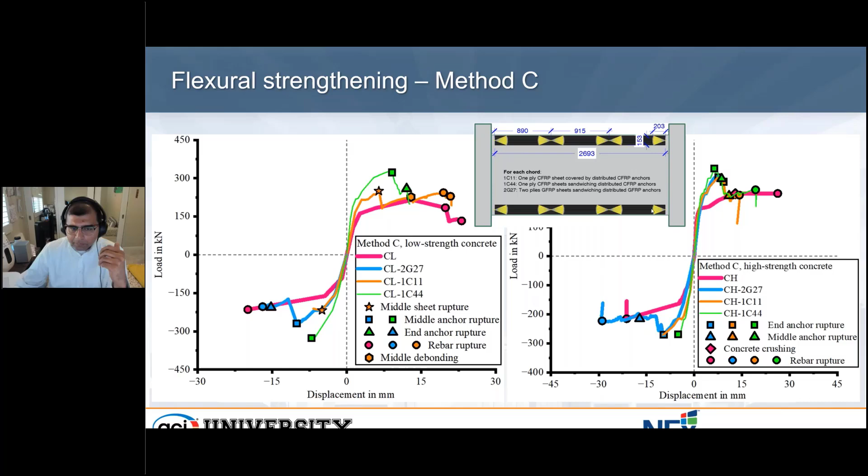So anchoring again is important, as we keep saying, for the duration of your presentation. So just how do you design these chords?

A summary of the tests that were done: unanchored chords result in a reduction of your deformation capacity. End anchors increase the moment capacity without compromising your deformation capacity.

Middle anchors, especially for larger diaphragms where you're putting these 100-foot long chords, you just don't want to anchor at the ends of the chords. Your middle anchors need to be designed so you're not concentrating too much stress at that anchor location. They need to let stresses go beyond them.

ACI 440 currently has flexural provisions in the flexural debonding equation. For chords, it's probably a good equation. You might consider taking another reduction factor because the ACI 440 equations are based on beam flexure, where you're really helped by the curvature, but in a chord or collector, you don't get the benefit of that curvature. So you may take a 0.85 or some reduction there.

And then anchors should not be spaced more than 8 feet apart based on the geometry of the test specimen. So again, adequately anchoring helps the performance of your FRP strips quite well.

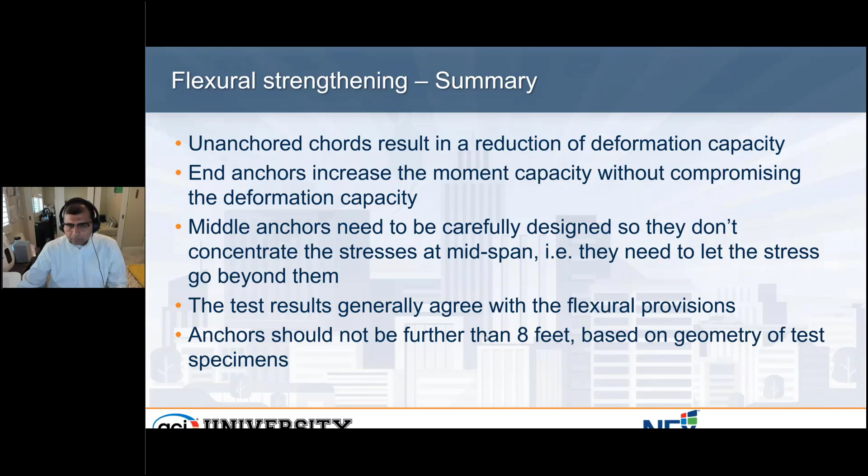Just wanted to note, like Enrique mentioned at the beginning of the presentation, a lot of people contributed to this. Virginia Tech team was very instrumental. Enrique already pointed out University of Auckland, Ravi Kanetkar with KL Structures, Simpson Strong-Tie team, especially the lab team, where hundreds of these tests were done in the lab. And Garrett Hagen with Degenkolb, who helped a lot with data analysis and coming up with these guidelines for design as well.

And that's all I had from my side.